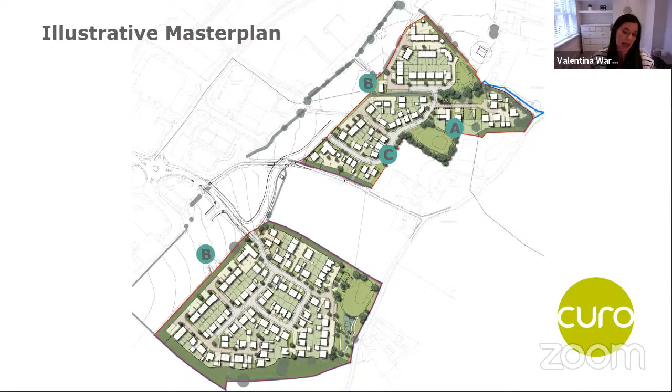What we're showing you now is the overall master plan we're proposing. It covers the key changes we've made since the outline planning permission as a result of feedback from local stakeholders and residents. There's been an array of changes and evolutions.

The three main elements we'd like to point out this evening are the retention of the farmhouse and converted barn, annotated with the letter A. While permission was granted for demolition of the farmhouse and outbuildings, we're aware the local community and stakeholders wish to retain these assets. We empathise with this, took it on board, and reviewed our proposals, including our drainage scheme and distribution of open space in this area, and we've now made it possible to retain these.

The second element that has been quite a drastic change has been the reorientation of the properties to protect from noise, because there will be a commercial element coming forward as a separate application, and it would only be relevant for us to respond to that. So we have reorientated the houses in the areas labelled B on the plan.

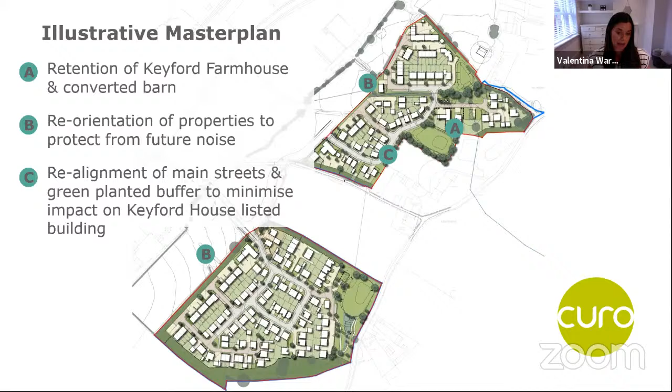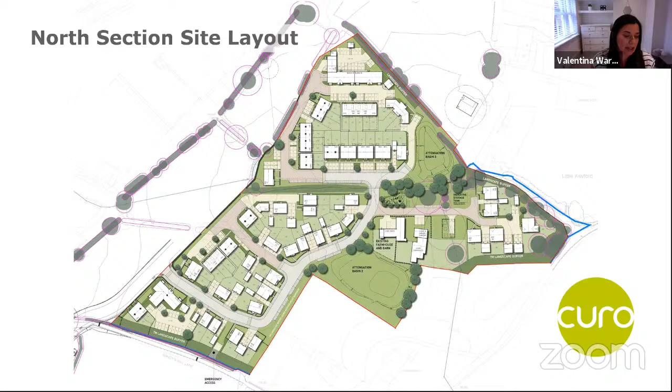This shows a close-up of the northern section of the layout. And then onto the southern element of the layout, which contains a lot of the area for bat mitigation and ecological corridors, which I'll come on to in a moment.

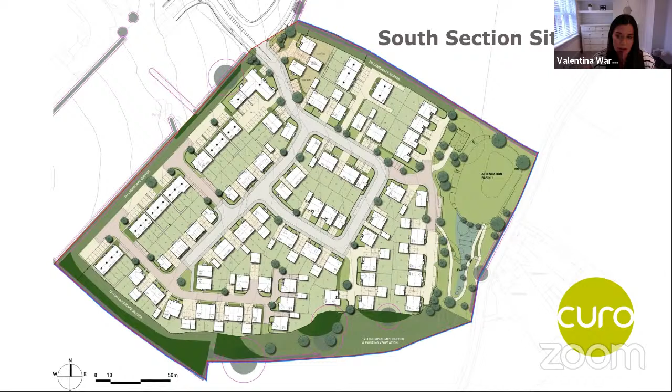Touching on the green infrastructure, we are proposing to reflect what was agreed under the outline planning permission and satisfy those quantum of areas, including 2.12 hectares of open space, which includes 1.66 hectares allocated to bat replacement habitat, overall an over-provision above and beyond the Section 106 requirement.

In addition to the open space, there will be two areas of play, one in the southern part and one in the northern parcel. Finally, in terms of pedestrian and cycle routes, they will be enhanced through the scheme, which I'll touch on in a moment.

This breaks down in more of a diagrammatic form the subcategories of open space. This is the northern area, so you can see the play space in pink, quite centrally located, well overlooked by future residents, surrounded by other areas of open space and informal areas of play.

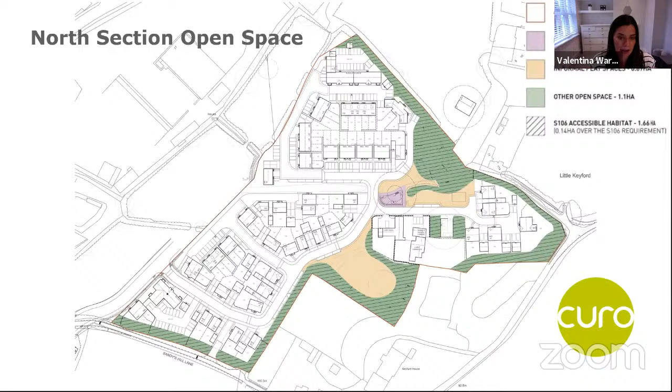Moving on to the open space in the southern section, as I touched on, this does contain, almost on the periphery of the site, ecological corridors. The dashed line will be accessible habitat, which we've been working closely with our ecologist on, along with the play space on the eastern area, again in pink, well overlooked by residents. It also connects through with a pedestrian link from the development through to the eastern boundary for others to access.

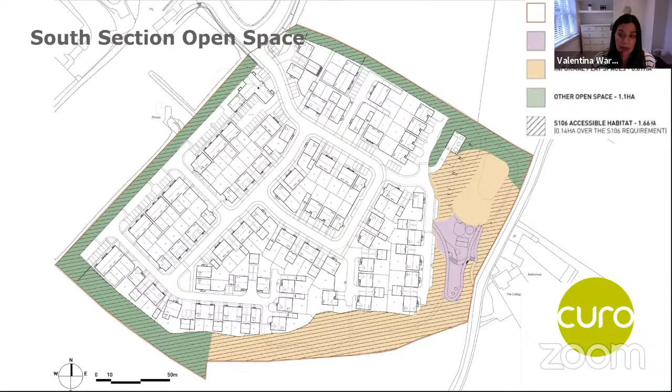Which moves nicely onto our slide for access. Oh gosh, I'm really sorry, is there a little bit of background noise? I'll try and speak up.

We are proposing a well-connected movement network throughout the site, consisting of the link road into each parcel that runs off Sandys Hill Lane. This will follow the existing alignment from Sandys Hill Lane and will be downgraded from a vehicular lane to a footpath and emergency access. The northern part has a clear street hierarchy with a spine road, whereas the southern adopts more of a central loop with secondary streets coming off that. All adoptable streets are designed to adoptable standards with clear classifications and a more sinuous highway design incorporated along the open space edges.

An element we're quite proud of is the new pedestrian routes, which I've touched on. You might be able to see, in the dashed green leading to the southeast corner, routes running through the landscape buffers and the play space. Similarly in the north, we've got a pedestrian link running beyond the northern boundary to connect into the wider existing context.

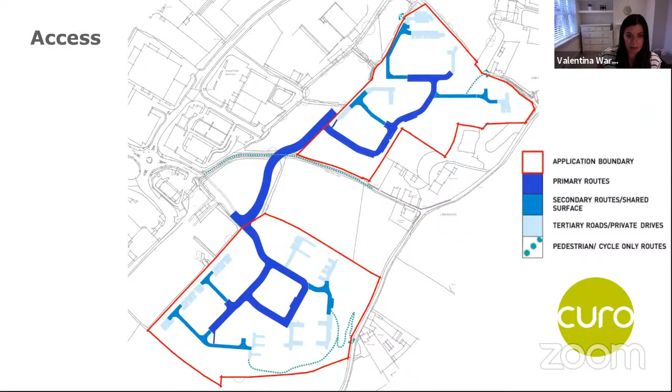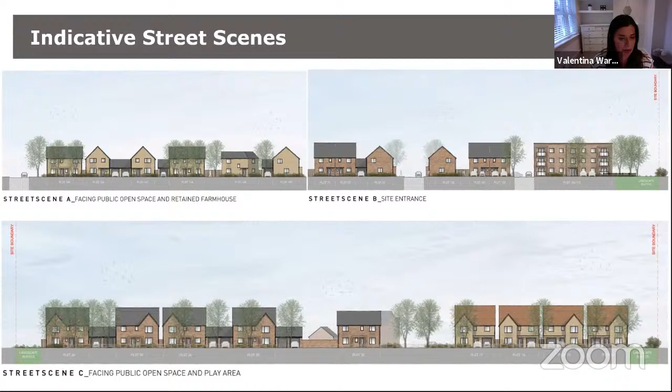The architectural character of the dwellings will be drawn from the built form in the neighbouring listed buildings as well. Predominantly the dwellings will be of brick, but we have touched on more of a built form taken from the listed buildings in terms of stone and architectural features that are enhanced in pockets to the north of the site. In addition, the existing farmhouse and barn will be retained and integrated into the proposals in the north area of the site.

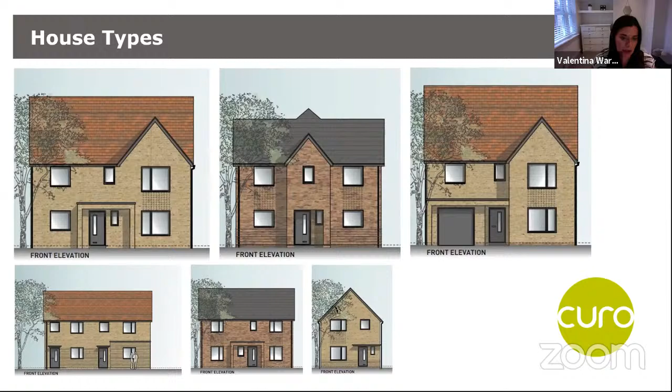These show a little bit more detail of the houses running broadly throughout the scheme. But as mentioned, we have got a separate appearance for the dwellings at the north of the site that will be included in our submission.

Thanks, Jess. I think sometimes it's hard to get across the true nature of a place just with technical drawings, so we thought it might be helpful to give you some examples of previous schemes that Curo have developed. Here are a range of images from a few different developments - we've got a couple from a scheme in Bath, one in Yatton, and one in Keynsham, just to give you a flavour of what we've built elsewhere.

I think it's fair to say that we genuinely try to create high quality and attractive places. And I think that's more important for us than other developers, because we retain the affordable housing stock - 30% of it will be retained by Curo and lived in by Curo customers. So we've got a long-term interest in the development, and that's borne out through what we try to deliver.

So just picking up on a couple of final points of detail in the scheme. In creating any new development, one of the big challenges is balancing parking provision - ensuring that there's sufficient numbers to meet the demands of residents and not lead to overspill parking, but also creating environments that aren't car dominated.

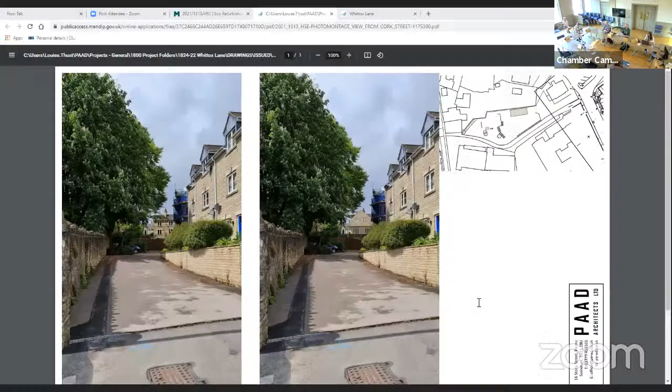Patricia Smith, who's the head of the Civic Society and the owner of 21 Melrose House, that shows - we will be submitting this as a document to the planning department - that shows the photo that the Civic Society used in the original application, which was incorrect because it showed the gates that were open, and it didn't show 4 West End Court.

So if you look at the photos there, the one on the left is the scheme as is, and if you look, there's a black blob just in the middle - up a bit, up a bit, up a bit, right, there. That is 4 West End Court, which has just been built, and it blocks every single view of the Grade 2 star listed house.

Whereas if you look at our elevation, we don't block any views. The design has purposefully been done so that it doesn't block any views as you go up Zion Path.

What they've also stated is that the extension is inappropriate on the eastern elevation as you walk up Zion Path. So if you pull up Jane, 1824 AL 108.

Now, if anybody - a lot of us have lived in Frome a long time - we know that Zion Path sometimes was unwalkable because of the brambles going down there. My client has subsequently cleared all the brambles, which has given this lovely view.

But we've contacted Somerset. They own this chain link fence, and they're willing to do nothing about it because it's in a state. So what my client does for her own security is, you can see in the top photo, she's planted a young yew tree hedge.

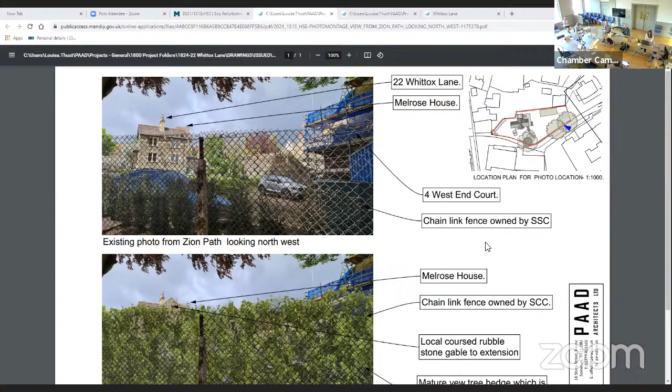And obviously that will mature over the next couple of years. So the bottom photograph shows the visualization with the extension and the mature yew tree hedge, which is trying to be respectful of the landscape, biodiversity, with the yew tree hedge.

I can't see anything on there, I'm afraid. So I do take contention with the Civic Society to say this is severely affecting the conservation area. They also say that the eastern elevation, which is that elevation, is a fine elevation.

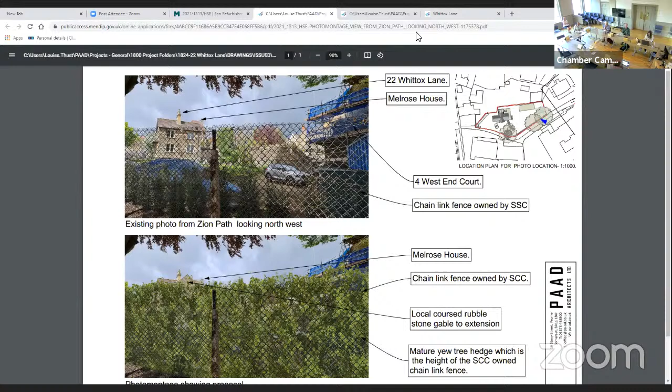Actually, I'll disagree with them because the principal elevation is the southern elevation, which... sorry, have you got the principal elevations, Jane? I will just have a look for you.

The principal elevation is the southern elevation, the main entrance to the house, which has a well-detailed bay window and gable. By creating the symmetry, we're emphasising the nicest bit of the building. We've actually analysed it.

The eastern elevation is actually poorly proportioned, and you can't see it all when the gates are shut. But as you walk down Whittox Lane, our elevation only reveals itself slowly, on the top half.

No, that's the existing. You can see the top left elevation is the principal elevation because you've got the nice bay window. But the bottom right elevation looks slightly off, proportions are wrong, because below the ground floor windows there's a lot more stone. It's slightly incongruous, so we don't see that as the principal elevation.

We see the southern elevation with the main entrance, and we're making that into an elegant elevation for the building.

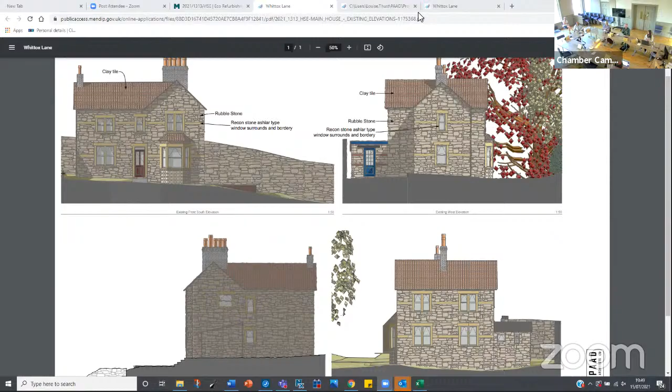The next issue the Civic Society and Dr. Patricia Smith have raised is that we're blocking the view down Zion Path. This is information I've just submitted to the planners, only today. There is a land boundary dispute between Dr. Smith and the applicant, currently in the hands of lawyers.

Despite this, Dr. Smith has erected a fence. So if you walk down Zion Path now, you will see a lovely timber fence blocking the view down over the houses.

This brings me to my final point, I'll be quick, I promise. The Civic Society and Dr. Smith say all the materials are alien to the site.

So we have a simple timber porch with a sedum roof to emphasise the entrance and make it more low carbon, so that it's not lost. What Dr. Smith neglects to mention is that on her own building, 21 Melrose House, she has a timber clad entrance porch, which is what we're doing.

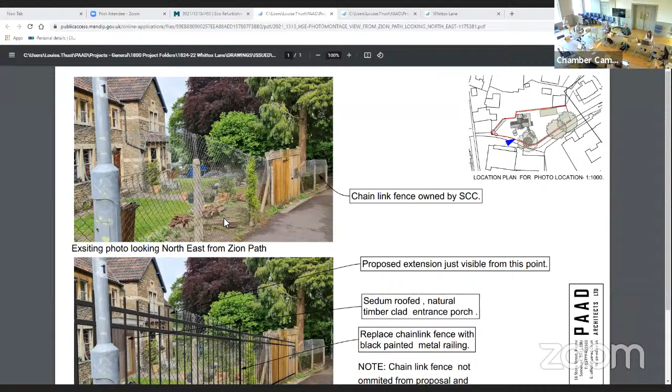I struggle to see how they're different, how on a Grade 2 star house you can have a new timber clad entrance porch, but on an NDHA we can't. It's a very simple, minimal, contemporary extension. We didn't want to fight the building, so we kept it minimal.

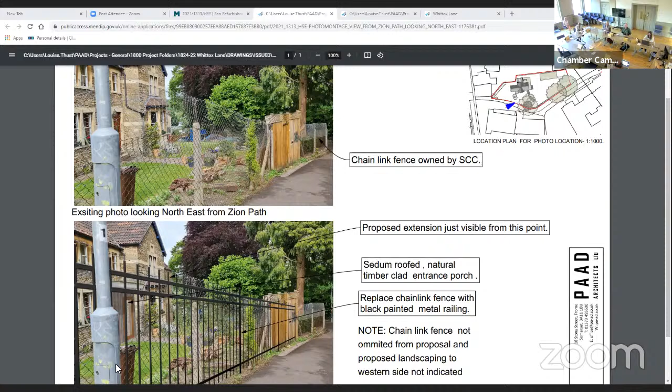As you walk down Zion Path, the top image is existing, the bottom image is proposed, and you cannot see the two-storey extension. The building has been massed so that, walking down Zion Path, you can't see it. But past the railings, where there's hedgerow, you won't see the extension either, down where we've got the chain link.

So we've opened up what is the most elegant facade of the building by proposing some nice metal railings. That chain link fence is owned by Somerset County Council. My client, the applicant, at her own expense, is putting some nice black metal railings there, more in keeping with the area, which will open up the view to that principal elevation of the house. So we're proposing that as well.

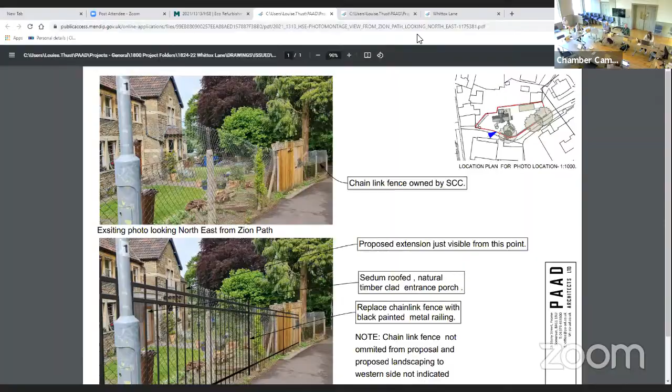One of the other issues was parking. Highways on the original application had no objection. We showed there's provision for 4 cars, which is more than we can put, so we meet that.

There was an argument about how we ascertain sustainability on this. There is no defined matrix to define a sustainable house at the moment, or passive house. We haven't got the money to do a passive house, and this is an existing building.

What I would like to say is we're local architects, both directors. One has built a zero carbon new build house, and I've just totally eco-refurbished my house. We practice what we preach. If we're to meet our targets for Paris protocols, it's not the new builds we need to worry about, it's our existing houses.

We are proposing aluminium windows, which are much more thermally efficient. They will be painted so they look like the painted windows in the existing house, so it will look the same. They will be triple glazed, ultra thermal efficient, improving the thermal efficiency of the building.

We will be insulating the building. I'm not going to say what form of renewable energy we want them to put in until we do a detailed design, I can't define that yet. But we will be applying for the renewable heat incentive to decarbonise the house and take it off gas.

And that will be part and parcel of that. The other issue brought up by the Civic Society is that the sedum roof is alien to the site. I think the site's full of grass, lawn and trees. I don't think a sedum roof is alien to the site, it's part and parcel of it. It breaks down the massing of the building, enhances biodiversity, and mitigates rainfall because the sedum will attenuate it.